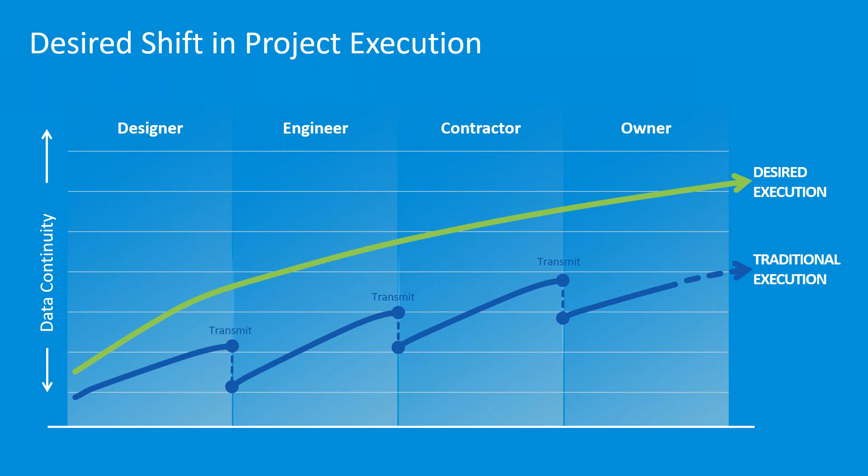So essentially, if you have in the end a very rich model where we've used asset tracking, where we've used all of the different aspects of BIM 360, then we get a very intelligent model that we can report on, that we can hook up to sensors, et cetera. So that's really the story of digital twin of 2 weeks ago. But as I mentioned at that time, there is really a piece still missing, which is in pre-construction, which is sort of the constructability.

Can we build it? How does clashing work, et cetera, which is really the remit of BIM 360 Coordinate. But essentially, again, single source of truth, we do get our common data platform, which is BIM 360 Docs as the main driver and vehicle, if you will, for all the information. And then depending on the discipline that you're working in, there might be some added tools on top of that, such as BIM 360 Design, but also BIM 360 Coordinate and BIM 360 Build.

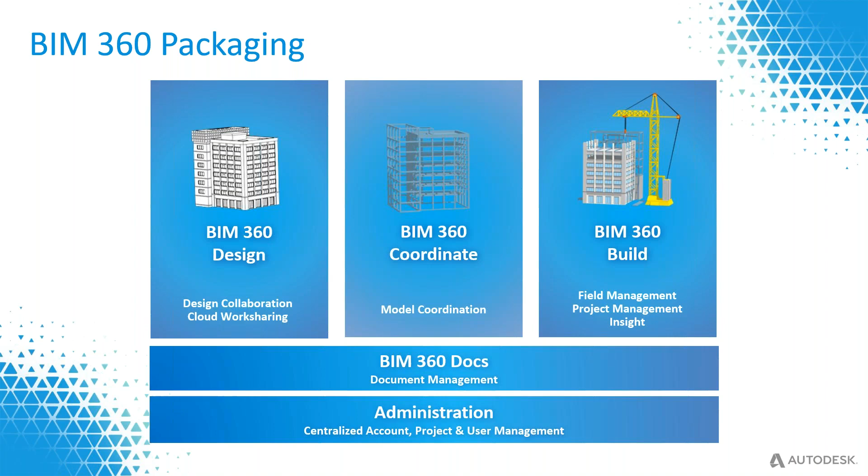So over time, before the holidays with the BIM 360 Design webinars, and then after the summer holidays with Digital Twin, where I did talk about BIM 360 Build as well, the only thing that sort of was missing was BIM 360 Coordinate. And there is quite a bit to talk about here, so that's why I kept it in a separate webinar. So that's what we're going to be looking at today.

So BIM 360 Coordinate, essentially, these are things that we see around the business. So in general challenges, it essentially is, again, around communication, right? We've already talked a lot of times about BIM 360. One of the key aspects I keep saying, and I keep repeating myself, is indeed that large model viewer, which allows us to view just about any file without the original authoring tools such as Revit or AutoCAD or Civil 3D or even Bentley MicroStation or whatever.

But still, when it comes to collaboration between different disciplines, yes, we've seen BIM 360 Design, yes, we've seen packages, but what about making sure that we don't have clashes, for instance? How do we make sure that we have communication between those different teams from that aspect? How about missing project information? Do we have all the relevant information inside of the same location? That's also very important.

And then one of the last aspects is that coordination is indeed considered to be a specialized activity, not just from the discipline itself, where we have to understand how to filter clashes, because if I just clash one model against another, I'm bound to find thousands of clashes. So you need to sort of filter out and understand what these clashes mean, but also because it is critical that we do coordination between different disciplines.

So what we're doing is with BIM 360 Coordinate, which again sits on top of BIM 360 Docs, such as BIM 360 Design is doing, such as BIM 360 Build is doing, it essentially means that we can, in the cloud, make sure that we have democratized coordination. It essentially means anyone can have a look at those clashes and understand what is going on. It also means, because we use the power of the cloud, that we can configure automatic clash detection. So essentially it means we upload something to BIM 360 Docs and it gets clashed automatically.

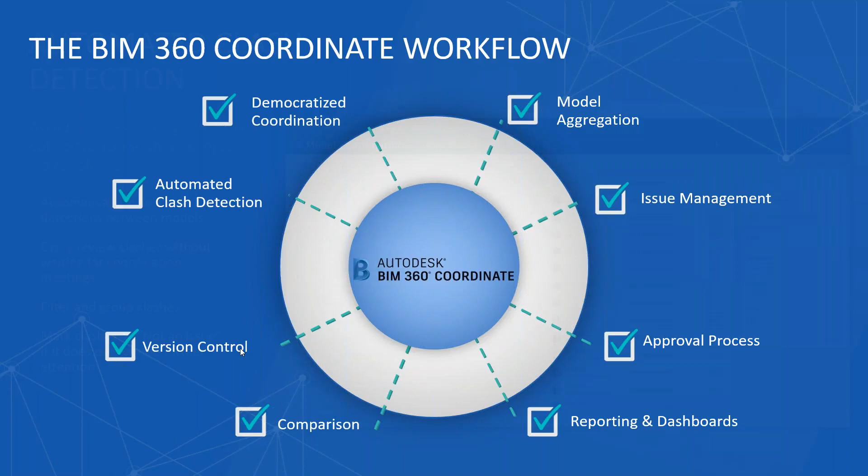Issue control and version control. So it means that we can have issues on clashes, and maybe in the next version we've solved that problem, so those issues can be closed. And so essentially that's sort of what we're looking at from a BIM 360 Coordinate point of view, right? So automated clash detection, and we'll go through the actual tool in a second.

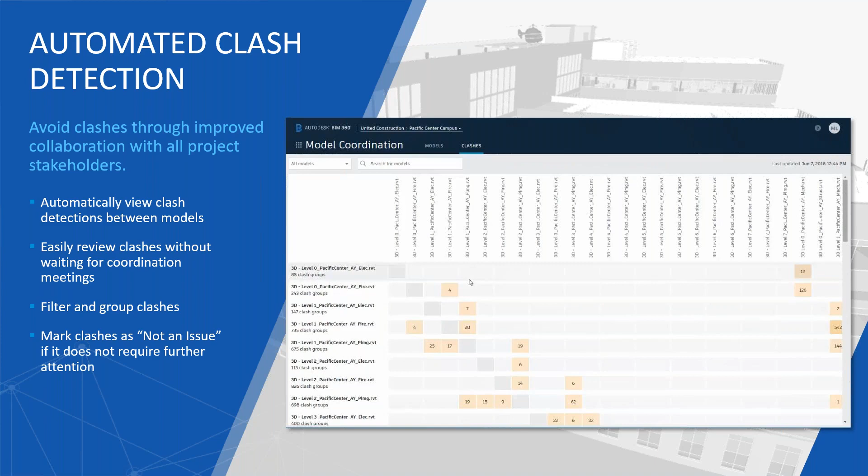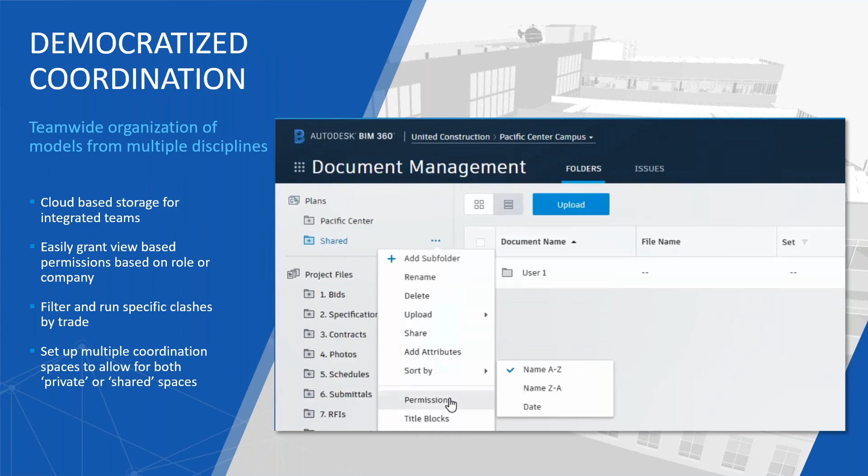It essentially means that we've got what we call a coordination space. We drop data into it and automatically we get the clashes. We get this nice matrix layout, which will help us understand how that clashing is working. So that's one aspect. We'll see all of this in action in a second. So automatic clash detection. As I mentioned, democratized coordination. It isn't anymore about having to understand how to upload. No, it is BIM 360 Docs at the basis.

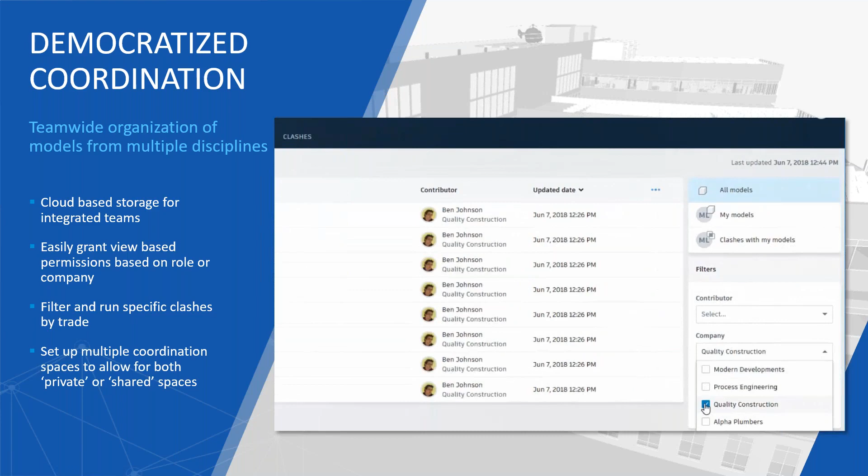I'll talk about a workflow which will leverage BIM 360 Design actually, and the packages there. But we can leverage that information right inside of BIM 360 Coordinate. So essentially it means we have a design, we save it to the cloud, and we automatically get our clashes out of it. We'll talk about that workflow in a second.

And then model aggregation. One of the things that we can also do is that, well, obviously, if we want to clash elements from, let's say, structural to HVAC and vice versa, or to electrical or whatever, it means that we have to be able to bring those models together.

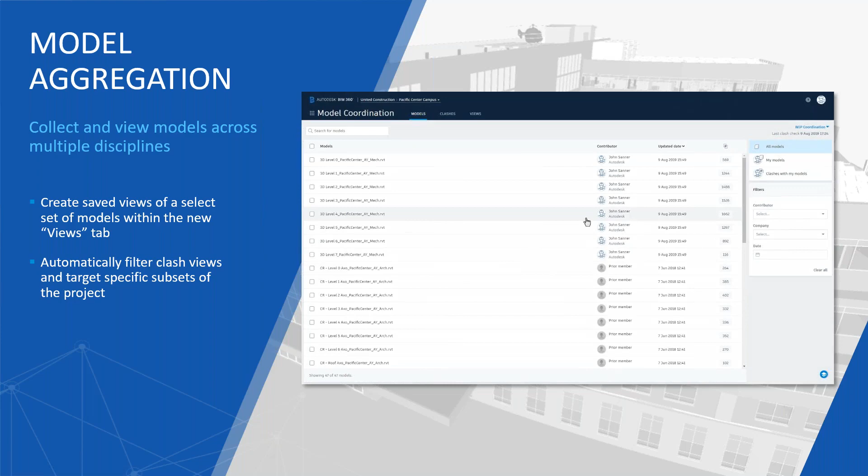So one of the aspects of BIM 360 Coordinate is also that we can view different models in context of one another.

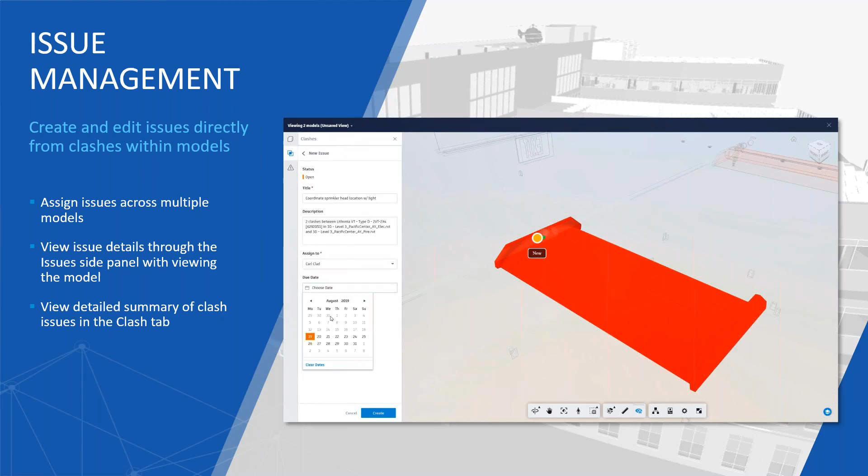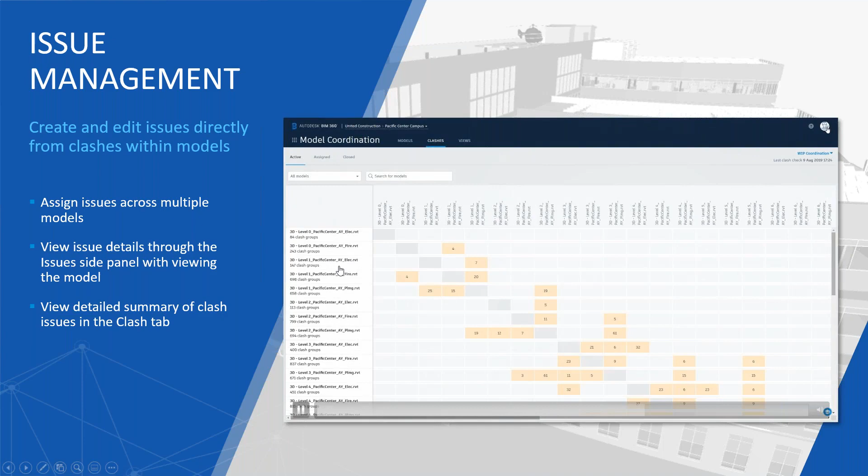Last thing is obviously when we find clashes, we need to be able to create issues on them, and that's what is happening here. Once we find a clash, we can say, let's create an issue. The most important thing here is that, as in BIM 360 Design where we can approve packages or send packages back, we can create issues on those. We can create issues in one file, we can create issues in BIM 360 Coordinate, and they all end up in the same place, which is BIM 360 Docs essentially. So we can start reporting on them and pulling out information from them, etc.

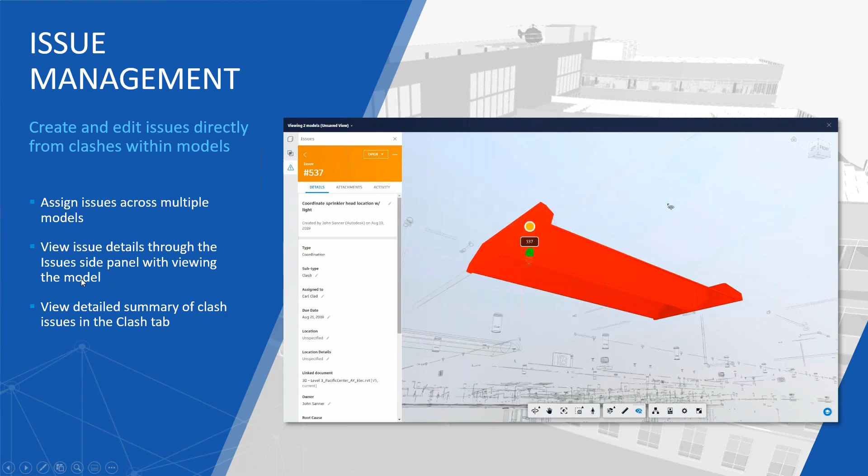So that's what I want to highlight from a PowerPoint point of view for BIM 360 Coordinate. Let's dive into the actual environment. I've got my BIM 360 Coordinate open here.

Actually, it is, of course, BIM 360 Document Management at the basis. And again, if you followed the other webinars, you'll notice I'm in the very same environment, the very same BIM 360 Docs project, which is BIM 360 FY21. So again, to reiterate the fact that this is a single source of truth - when we talk about BIM 360 Design, we talk about these folders here where we have our architectural project, our MEP project, etc.

Now, what we have here is what we call a coordination space in BIM 360 Coordinate. I've mentioned this in the previous webinars as well. We're looking at our single source of truth from a document management point of view here, but we can also filter our information based upon what we're looking for - for instance assets, which I spent time on last time, or cost management. So there are ways of filtering this information. Amongst other things, there is this model coordination aspect, which I'll dive into in a second.

Essentially, the only thing we need to do is tell BIM 360 where my coordination spaces are. In this case, I've created my aggregated folder here, and what you'll notice is it says master.rvt - one file is in my aggregation space.

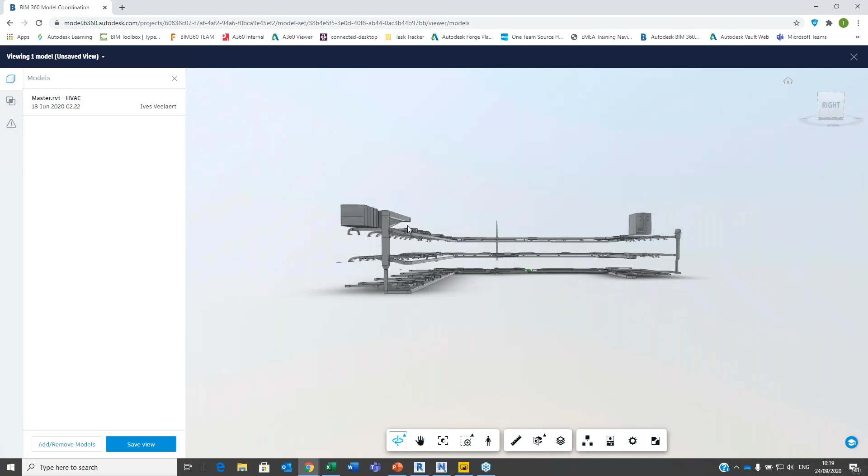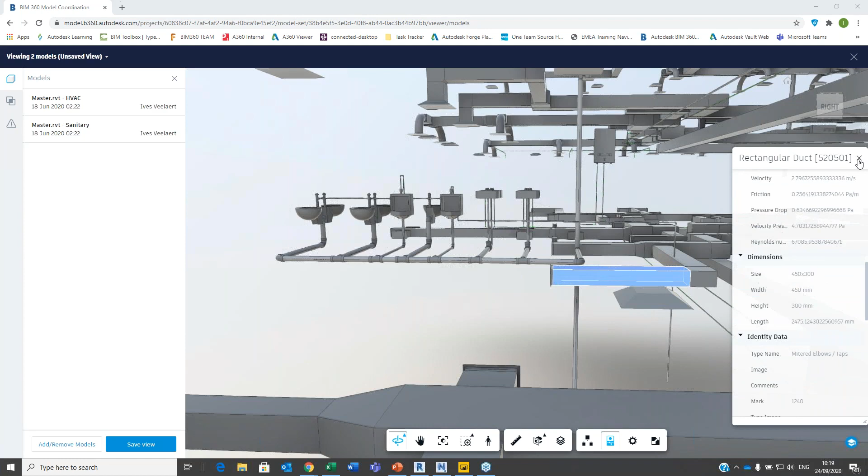Okay, nothing special. This is what I've just shown you in BIM 360 docs itself. This is indeed the HVAC system, right? So that's what we have in the building. The difference is that I can now say add remove models, and I can say, okay, I want to have sanitary as well. So you'll see that it's now loading 2 models, and there's my sanitary. And I've got all the richness of this viewer still there. If I want to understand what this is, I can go into the properties, and it's going to tell me this is a rectangular duct. It's got all the information from Revit inside, and that's what we see here.

Okay, so yeah, we've got HVAC, we've got sanitary. Let's continue to add some stuff. Maybe the electrical bits and pieces. Let's have a look at that. So we now have the lighting fixtures, we've got the electrical sockets, etc., and we can continue to move on.

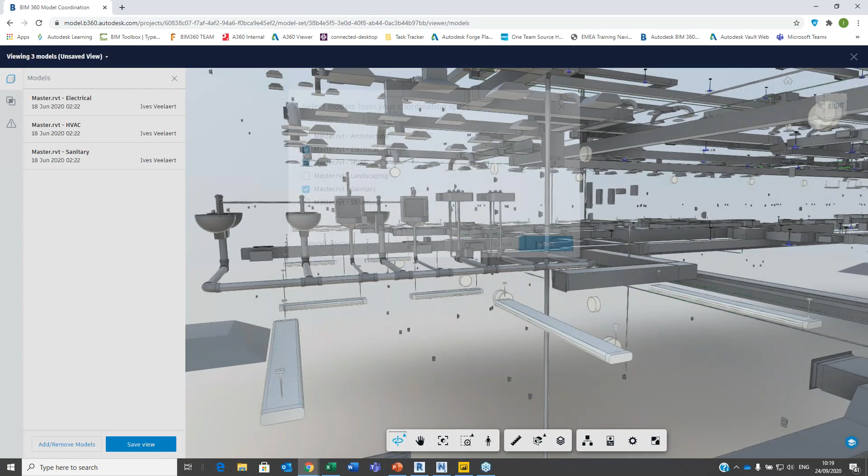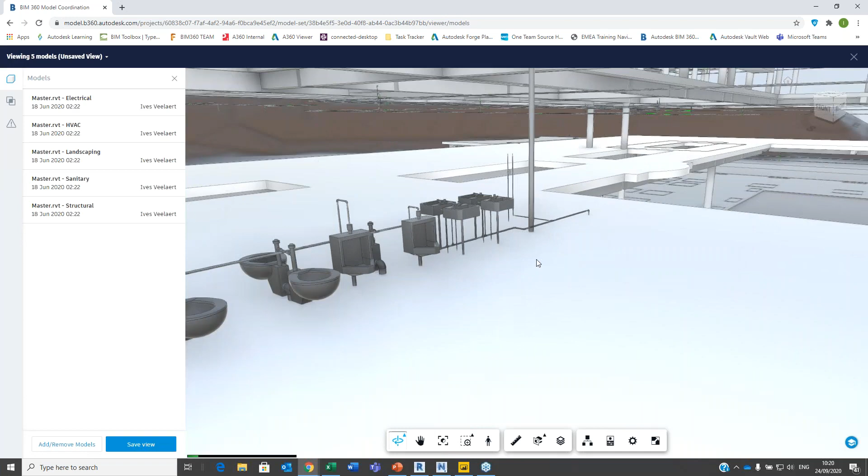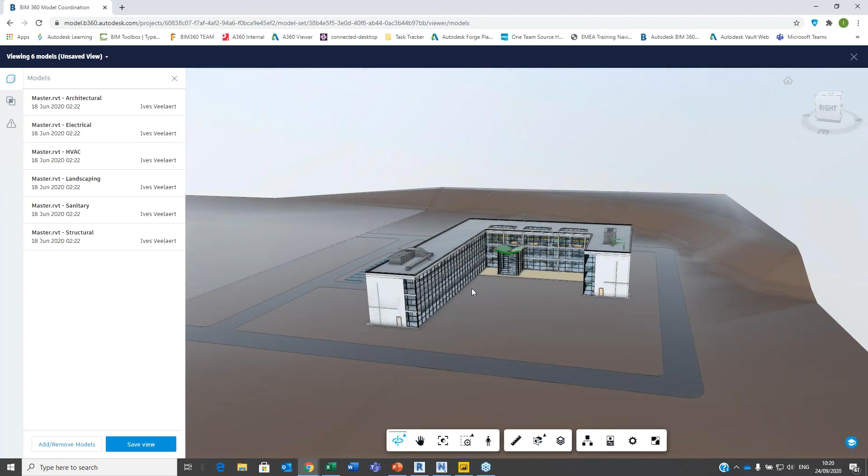Maybe I want to see the landscaping now. No, let's first do structural, select. There we go. So now we've got floors, actually floor slabs. And let's continue, I want to have the landscaping, select. Okay, so here's my terrain now. And finally, I'm going to add architectural. So those are just views. So these are just views, you know, this is one Revit file, different views, and we're looking at this in a combination. Okay, so that's the first aspect.

And what we can do now is, well, we've got all those different models, so we can clash them. And actually, this is happening automatically, right? So we can go in here and say, look, we've got our clashes. And what we're looking at is a matrix of each and every one of the views clashed against one another. So architectural versus architectural, well, that's not going to tell us much because that's going to be everything, right? So on the central axis, it's the view against itself. That's why we don't have anything in here.

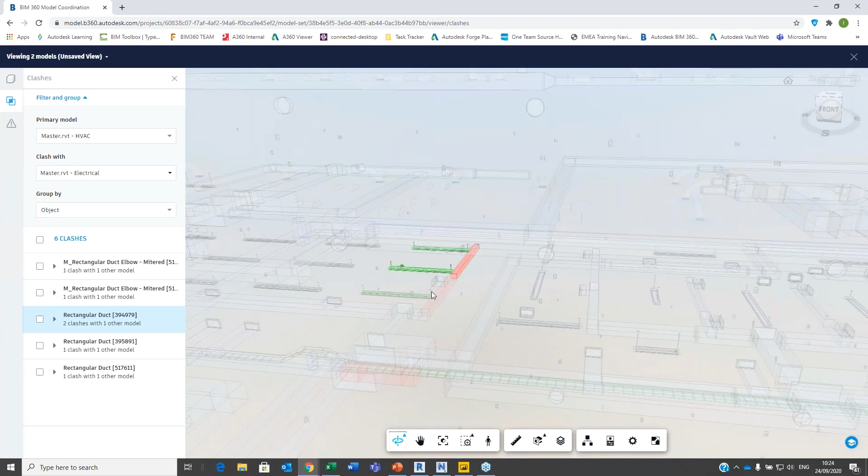Now, what you'll notice, and this has been added like this week, is that we've got our elements in context of one another, right? So HVAC versus electrical, and that's it.

Now maybe I want to see the rest of the model. So what I can do is go back into my models here, and I can say, you know what, I want all of—let's not take landscaping here, but let's focus on the rest. So I've just added everything.

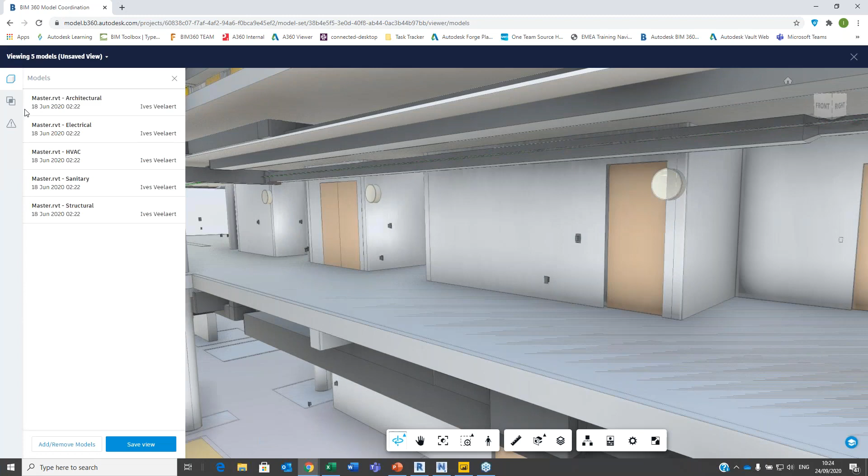If I go back to my clashes, I can now say, okay, HVAC, that's fine, and it's going to clash now with all 4 models. So it's now in the matrix, taking multiple columns together. We've got 1,118 clashes across everything.

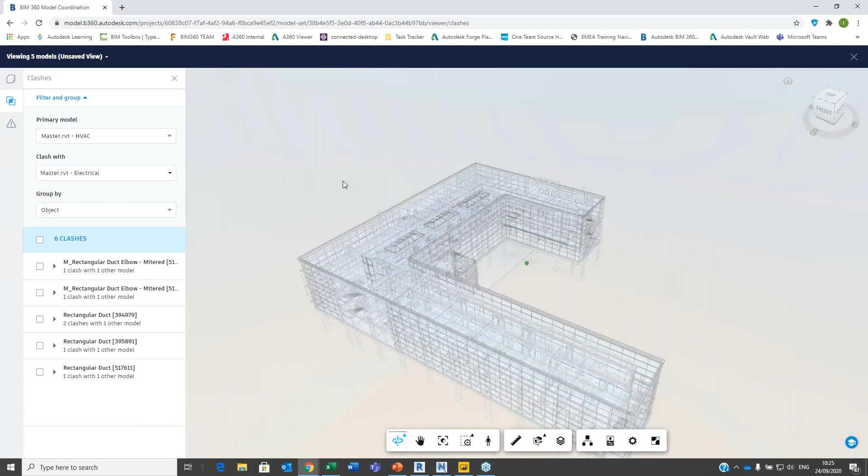Now, maybe what I want to do is still just focus on the electrical bits and pieces. So what we have now is, again, those 6 clashes, but now in context of the architectural model, etc.

And so from this point on, it's quite simple to say, I want to create an issue on this one. It's going to create a screenshot. We can assign it to someone, etc. You'll see that in a second.

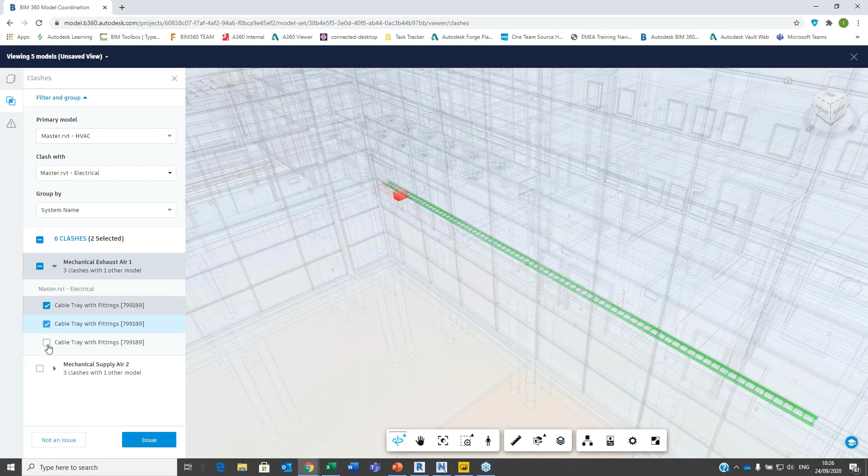Now, the other aspect is that we can also get our elements sorted by a certain group. So in this case, we're just looking at objects. We can also say, okay, in the case of HVAC, I want to understand this from a systems point of view. So the mechanical exhaust air has 3 problems with the cable tray, as you can see here. And again, we can create issues on that.

So, okay, I've got my views. I can look at the clashes. So let's go back to my clashes here for a second.

This is, as you can see, pretty flexible because I could say I want to search for models—maybe landscaping. What's the point of having landscaping clash with like a pipe that will run into the ground? So maybe I just want to get rid of landscaping. So what I can do is just remove this here.

And we now get a matrix of 5 by 5. Landscaping is out of the picture. So it's very flexible to actually go in and say, look, I want to understand clashes between certain views, certain models.

Okay, so back to basics. We've got our coordination space, we've set that up, it's a folder. We've dropped the file into it, and essentially we're looking at the results here. So there's still this piece missing in between.

So how do we get a file in here? We've already looked at BIM 360 Design in the past. So is there maybe a collaboration between BIM 360 Design and BIM 360 Coordinate? Well, let's go back to document management here. And again, I'm not going to spend too much time on BIM 360 Design here.

But essentially what we have is all of the different disciplines upload their model into their own work-in-progress environment. And at some point in time, they're going to create a package. And that's what we see in Shared, where we have the architectural model, the landscaping model, etc. So how does this relate, those folders, design and Shared, to something that is completely different, which is coordination?

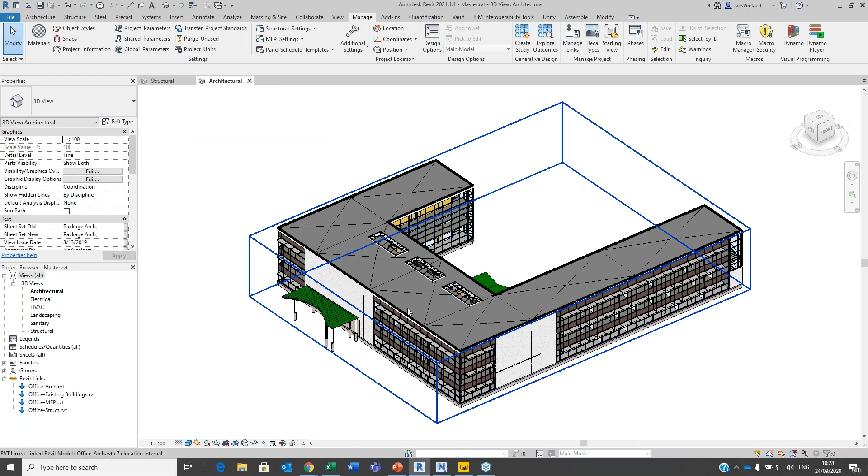Now, the question is, what did I upload here? So what you'll see is that I've got my different views. Those are the views that we do have inside of BIM 360 Coordinate. But what you'll also notice is I don't really have any elements in here. This actually is a link. Okay. So just to illustrate this, let's just quickly create a new view here, 3D view. There we go.

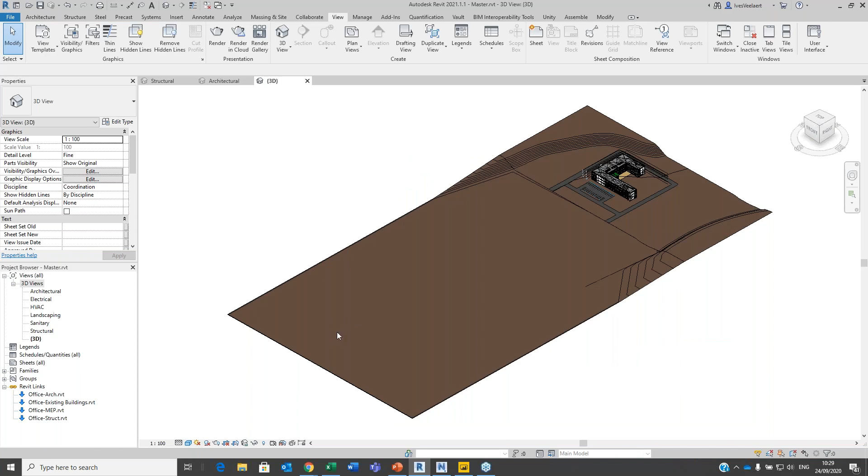So we've got everything here. Let's just fine tune this a little bit. Consistent colors. There we go. And I'll go in and we've got everything activated here. Let's just select all and activate everything. Right. So I've got all elements visible in this view. Right. So what happens if I now select everything here and we go and filter this?

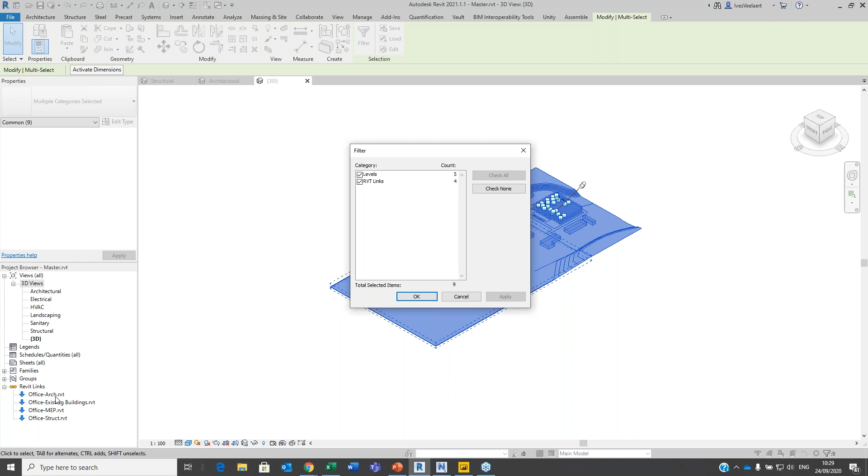Well, obviously in Revit, we also always have levels, but the only thing it shows here is links, Revit links, 4 Revit links, which corresponds to this. And guess what? Office architecture, existing buildings, MEP, structural is exactly what we see in here. And it tells me that office architecture is the one that I've linked from BIM 360, FY21, Project Files, Shared, architectural, shared landscaping. So essentially this file is an empty file. It just links in the information from this location, architectural, landscaping, MEP, structural.

So what does that mean? It essentially means that from BIM 360 Design, we get a new version, hit save to central, publish the file, create a package. That package goes into Shared. Those other disciplines, before they accept the package, they can actually just walk in here, look at master.rvt, understand the clashing, and see if it's all relevant to them. Okay, so that's what we have here.

Right. So the other aspect is that we can create issues, right? So we find a clash. So let's have a look at our issues here. And immediately what you'll see is that this one, master.rvt, it says here clash with cable tray. It sits in Document Management, and this is very important because it means that we can actually look at this file in BIM 360 Docs without a coordination module attached to it. It also means that we're going to be looking at this file from a BIM 360 Docs point of view, from a who's responsible for this point of view.

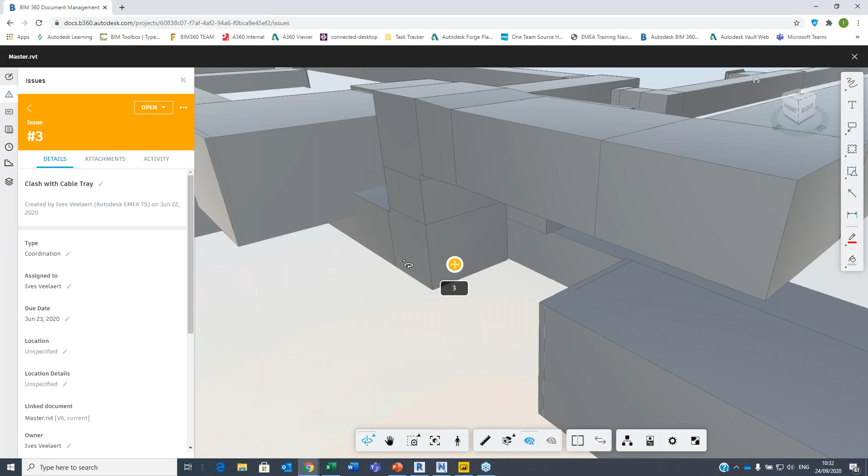And remember that in Coordinate, we had a view that we looked from and we clashed it against other disciplines. So essentially, the issue is being assigned to the view that we want to assign to a discipline. So what we have here is that we look at this from the HVAC point of view. This is the guy that needs to resolve it. Now, obviously, we don't really see the cable tray that's clashing because, again, this is basic BIM 360 Docs.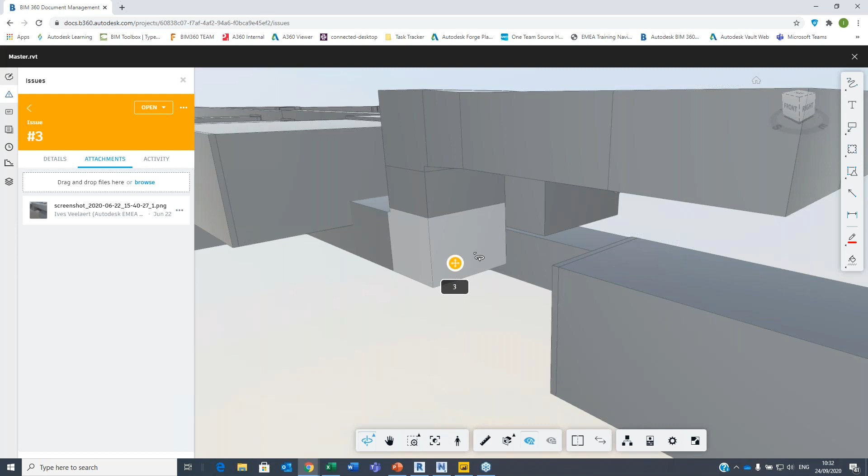We do have automatically an attachment here, and we could actually put some markups in there as well. But essentially, this is what we're looking at. So this is automatically attached to my issue. Okay, and so we can look at this, we can open the Revit file, we can pretty much try and solve this problem. Now, I did mention that we also have this collaboration with Navisworks, so let's answer a couple of questions that I tend to get here.

One is, how do you get to those views, you know, in model coordination? What if I want to split out by level is one of the questions that I tend to get. So I'm not interested in just this architectural file. I'm not interested in just this electrical file. What I want to have is certain aspects of the architectural model and maybe split out by level. This is something that goes back to, for instance, Navisworks, or maybe the equivalent in BIM 360 Glue in the past. Essentially, I want to slice and dice those models. Well, you can still do that.

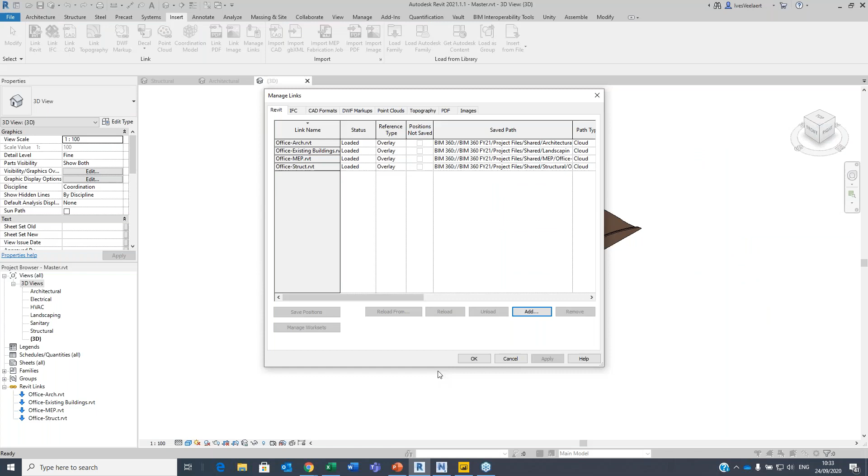What you can do is go into Revit, because these are just filters on my views, right? So if I want to have just the one level, I can do so. I can create multiple views and I can publish them into this environment. And if I then want to see, let's say, architectural, see, this is filtering out. So if I was to say I've got multiple levels and I just type in level 1 here, I would get all the disciplines, electrical, architectural, MEP, etc., of level 1.

So that's how we can class this. And again, we could also filter here where we say, okay, level 1. Of course, I don't have that in the title or anything, so we won't see anything. But that's where this matrix would get filtered out. So that's one aspect. Basically, it's down to Revit to make sure that we have these set up. And this could be in a template, right?

So no problem there. The other aspect is that with BIM 360 Coordinate, people tend to ask me, what sort of clashes do you do there? Well, BIM 360 Coordinate is, quite frankly, hard clashes. So it's zero tolerance. It's really a face into a face of different elements. So essentially what we have here is the very same workflow that we had in the past with BIM 360 Glue and Navisworks, where Glue is your preliminary check, which you can do on a daily basis. And it doesn't mean that you need to get rid of Navisworks. Navisworks is still your high-end clash detection tool. And the beauty is that these days, those two can be combined as well.

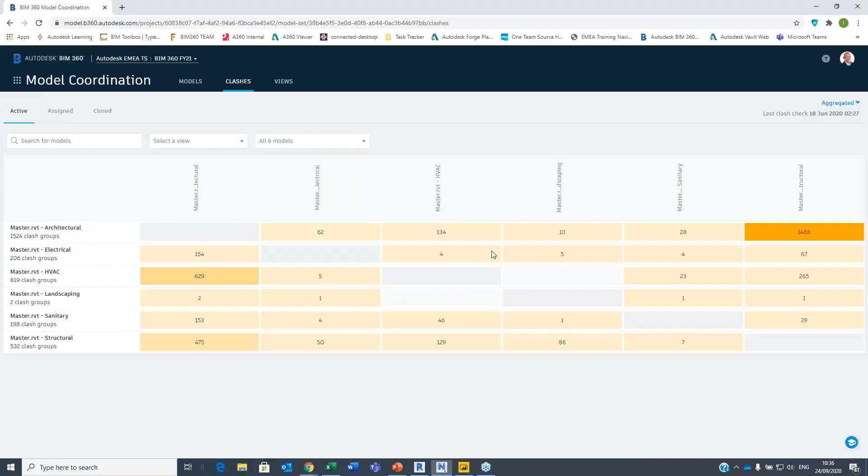And those views will pop up in my selection tree, and I can, again, slice and dice this any way I see fit inside of Navisworks. So it's loading all those different aspects. And again, we're looking now at those very same elements that came from the shared environment from BIM 360 Design, if you will. So let's first make this a little bit nicer, and let's do some horizon here. Let's start walking for a second and maybe zoom in a little bit. There we go. Okay, so we've got everything here, right?

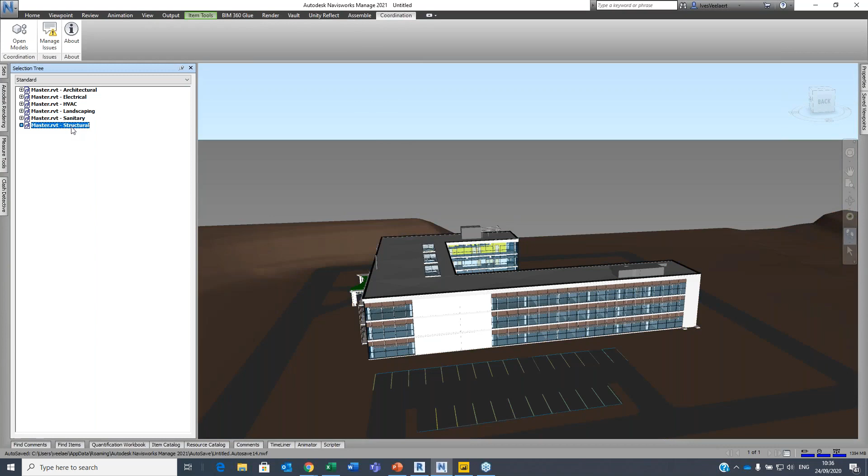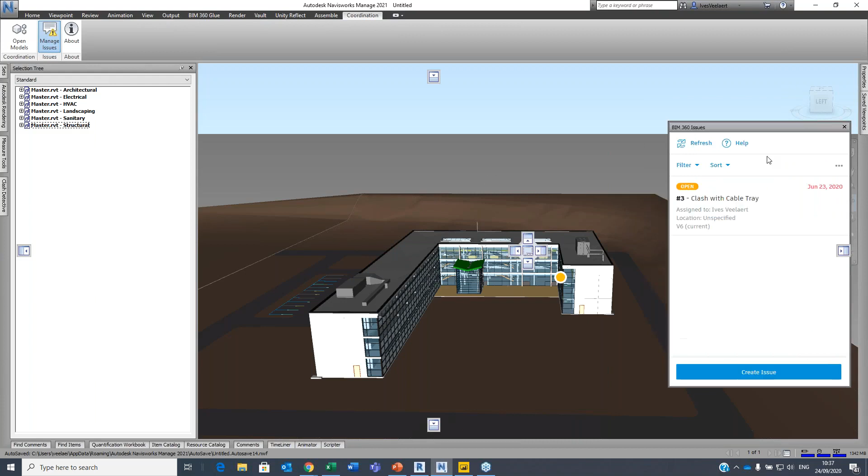So if I want to see my selection tree, let's just activate that for a second. We've got all of our different models here, which are basically views which came from the shared environment from BIM 360 Design, as I mentioned. And so what we can do now is take it to the next level. We've got all these views. Remember that I had this issue, which was the clash between HVAC and that electrical cable tray. So I can go in here and say, manage those issues. And you'll see that it says there's a clash with a cable tray, which again, I can view here.

So this is exactly the same thing as what we have inside of BIM 360. It has the same status. I could actually close it here or answer it or whatever. The attachment with the view is still there. Everything is there. Now we're looking at all of these different models. So we have that functionality of Navisworks just at our hands, right?

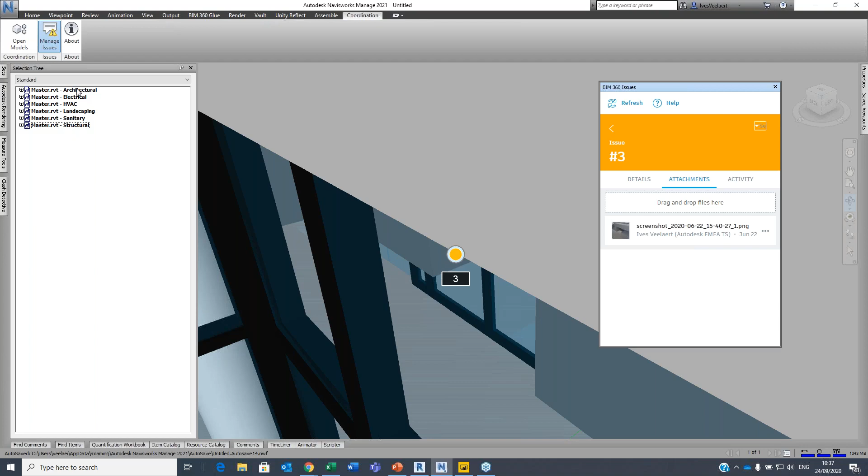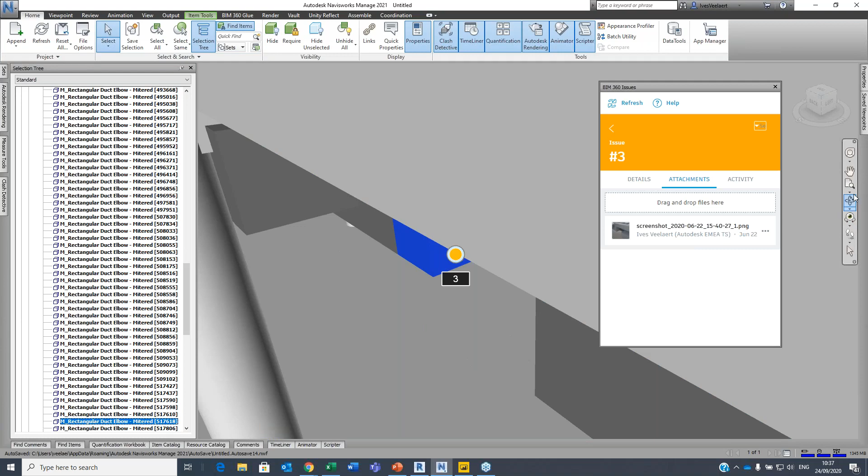So architectural, we want to get rid of it. Landscaping, let's get rid of it. Sanitary, let's get rid of it. Electrical, HVAC, that was important for this clash, of course. And you know what? I want to keep structural in as well. So what I can do now is basically hide those elements. There we go. And now I can have a proper look at this clash, which will show me the HVAC system and the electrical system as well.

Okay, so we've got all of this here. So let's take it again to the next level and let's rerun those clashes, but now from a Navisworks point of view. So what we're gonna do is let's just zoom out a little bit. This is fine. And what I'm gonna do is I'm gonna open up my clash detective. I'm gonna set up a test here. Let's just keep it as it is.

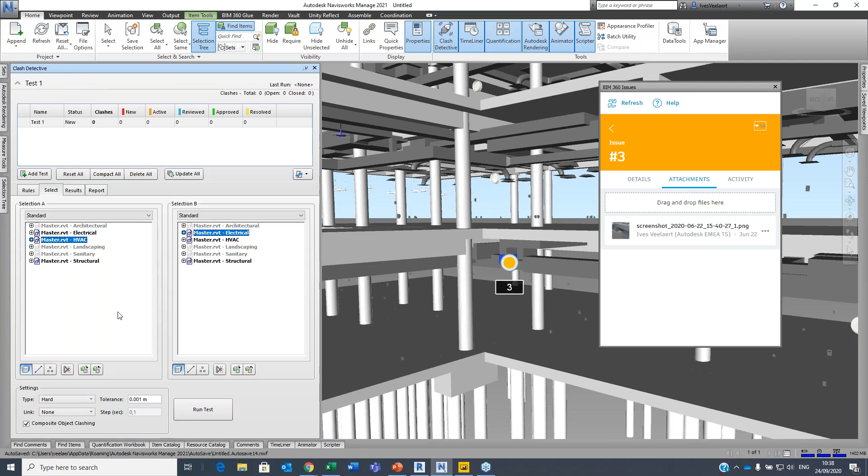And I'm gonna clash, let's say HVAC against electrical. That's fine. It's still a hard clash, but in this case, we could therefore fine tune it. Let's say HVAC electrical. Yes, that's fine. Run the test. And what you'll see is that we have 6 clashes, which corresponds again to what we have inside of BIM 360 Coordinate.

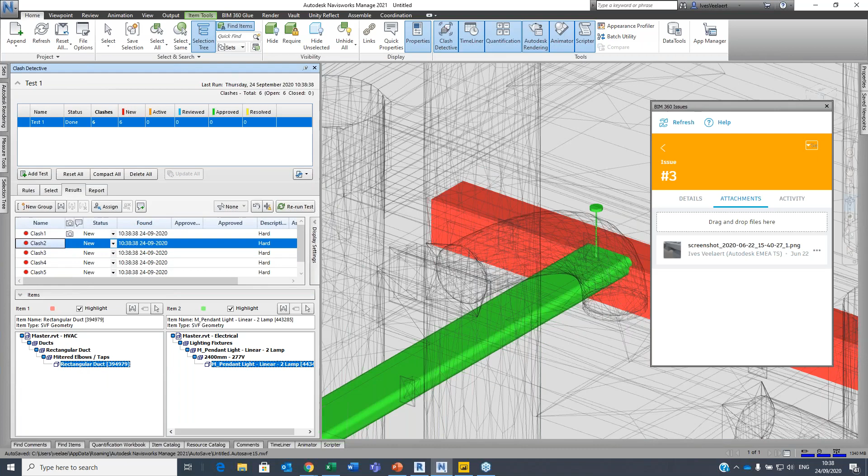All right. So we've got clash number 1, clash number 2. And interestingly enough, my duct here is the one that's causing the problem with the 2 pendant lights here, which corresponds exactly to what we've seen inside of BIM 360 Coordinate, right? So if I look at my 2 clashes here, that's exactly the same problem, and it has grouped them by the rectangular duct. So again, that advanced functionality that we have inside of Navisworks is still there.

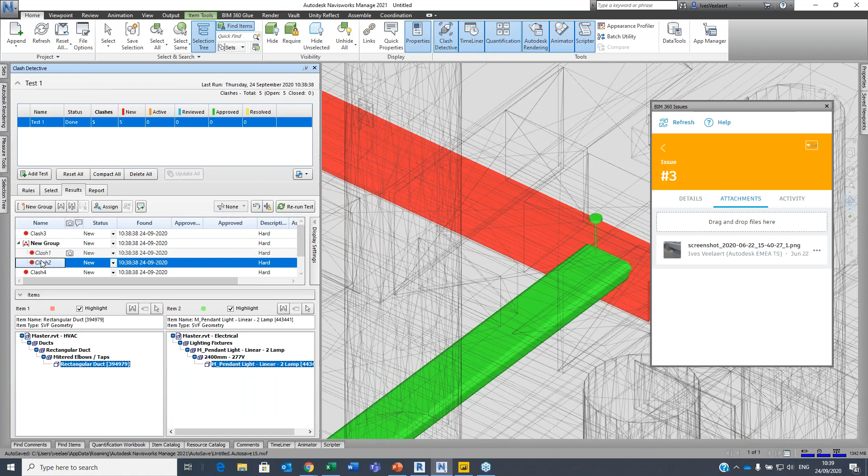So if I say rectangular duct, group clashes involving this item, you'll see that it now says this is a new group with 2 clashes, which is this one and that one. And again, if we now want to take it to the next level and say clash number 4, this is really a problem, I could just go in here and say, you know what, I want to create an issue here, assign it to this point. It will pop up in BIM 360. We can look at the issue list, etc. So a full-blown round-trip workflow between BIM 360 Coordinate and Navisworks. Okay.

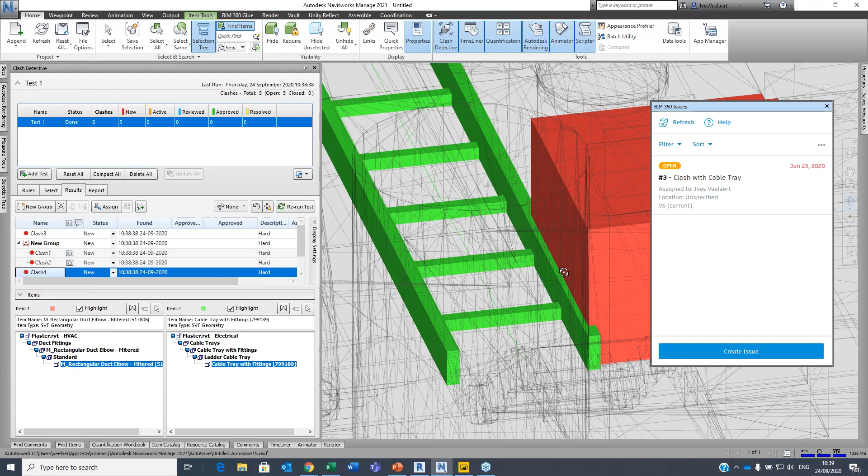Right, last thing. So how does this then relate as a Navisworks file to BIM 360? Well, remember that we still have Desktop Connector. So if I go into my Windows Explorer, what you'll see is that we have BIM 360 here, and we've got EMEA Technical Sales, BIM 360 FY21, project files. So I could actually go in here through Navisworks and say, okay, I want to save this as an NWF file, or I want to publish this as an NWD file and push this into BIM 360.

So anyone around the globe that has access to that folder inside of BIM 360 Docs essentially has access to that same view, those same results. They can go into the issues, they can look at BIM 360 Coordinate if they have access to BIM 360 Coordinate. Otherwise, they'll look at it from a BIM 360 Docs point of view. And so again, very flexible to tie all of this together.

I showed very specifically a Revit workflow. I haven't looked at the questions just yet, but I'm imagining there might be a question around IFC. So yes, we can do the very same workflow with IFC files as well. Right, so that sort of concludes that first step, which is BIM 360 Coordinate and BIM 360, and Navisworks. So let's go back to my PowerPoint here for a second.

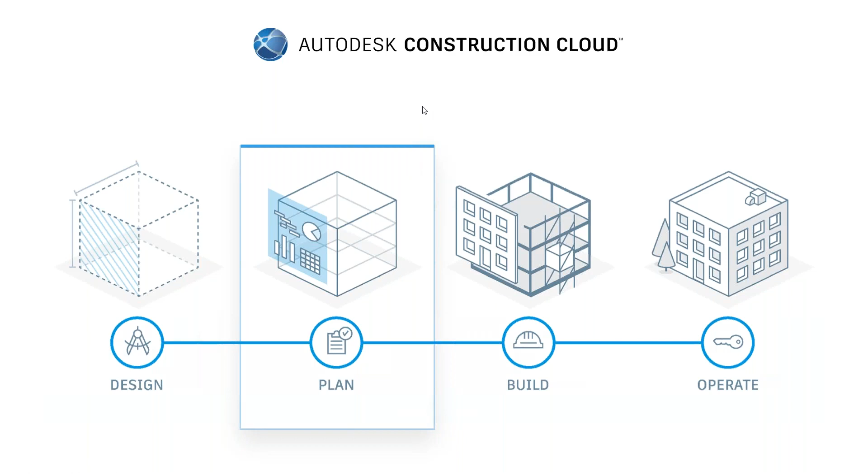And I do want to very briefly talk about Assemble here, because I do get a lot of questions. What's the difference between Navisworks and Assemble? What can you do with Assemble? Why is Assemble there, etc.? So Assemble is very much a tool that sits within the planning stage, just as BIM 360 Coordinate and Navisworks are sitting there. And Assemble basically does a couple of things that it's quite unique at.

It can validate information. So let's say that we move forward in design and we are adhering to LOD, level of detail or level of development. And at some point in time, fire rating needs to be added to a building, for instance. And we receive a file from the architect and we want to validate whether all doors have fire rating attached to them. So that's one of the aspects that we can very easily do inside of Assemble, verifying a model and if need be, sending it back actually.

Another aspect of Assemble is that it can do a pretty far-fetched quantification and indeed cost if we choose to do so. So essentially it means that we've got our design models, and through model conditioning, basically reporting on parameters on the Revit families, on the IFC models, on whatever can be uploaded in Assemble, and I'll get to that in a second, we can sort of put legends on it and say, okay, what sort of categories do we have?

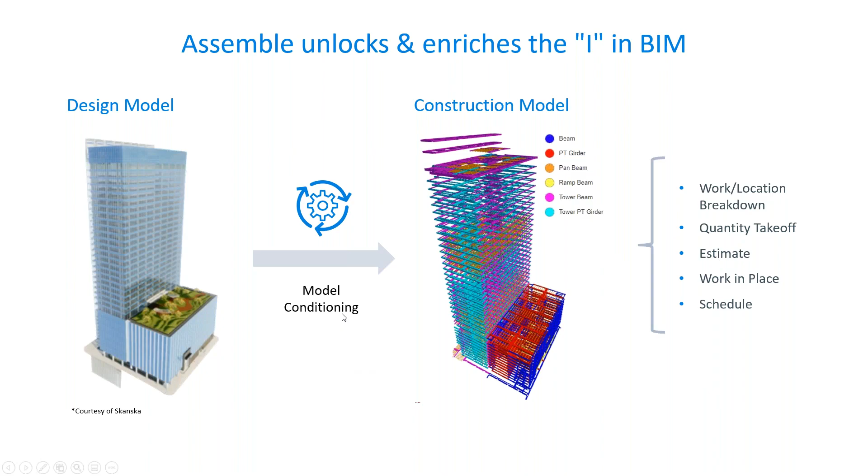We want to filter this by level maybe, etc. And essentially it means that we can enrich our BIM model with specific Assemble encoding, if you will, such as work location breakdown, quantity takeoff, estimation, etc. So that's what we have here. So again, let's have a look at how this is working.

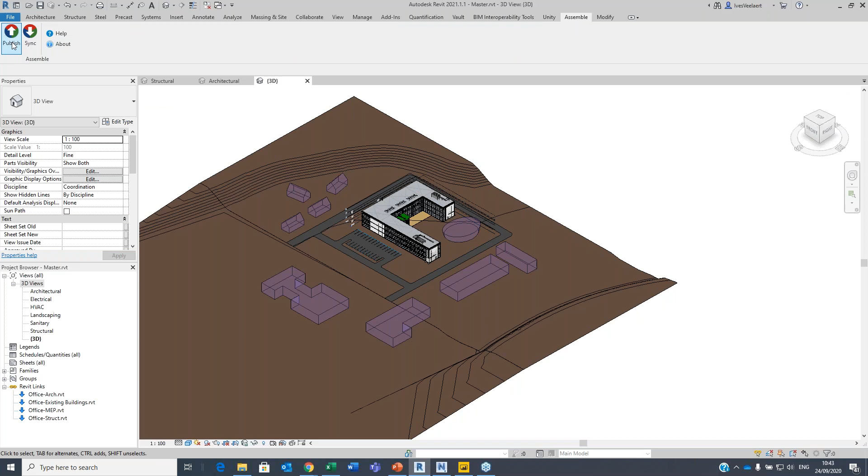So I've got my Assemble open here, and I've got a very specific project, which is this one, IVT. And what you'll see is that, again, we've uploaded those 4 very same models into Assemble here. So how do we do that? Very simple. From Revit, for instance, or from Navisworks, we've got this Assemble tab. We just go publish. We point to the right project that we want to have this information in, and it's going to publish those files.

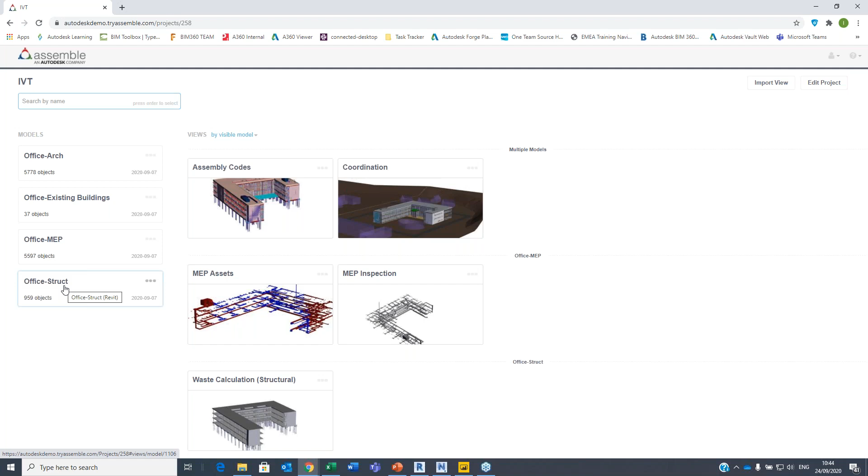So as I mentioned, this works for Revit, this works for AutoCAD, this works for Navisworks. So any file that you can get into Navisworks, we can also push into Assemble. Okay, so IFC files, etc. And the first thing is, again, same thing. So there is a bit of overlap with Navisworks. It just depends on what you want to use it for. So I could go in here and say, okay, I want to view this structural file. And this is going to represent that structural file in a little bit of a different way compared to how we see it in Navisworks.

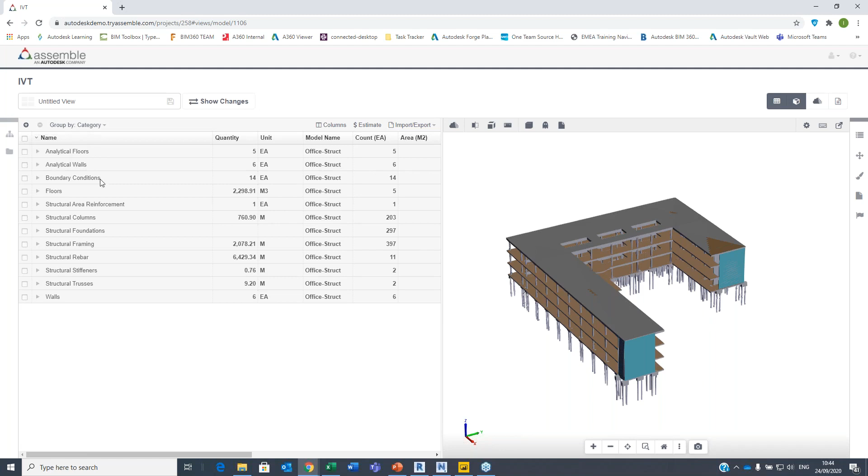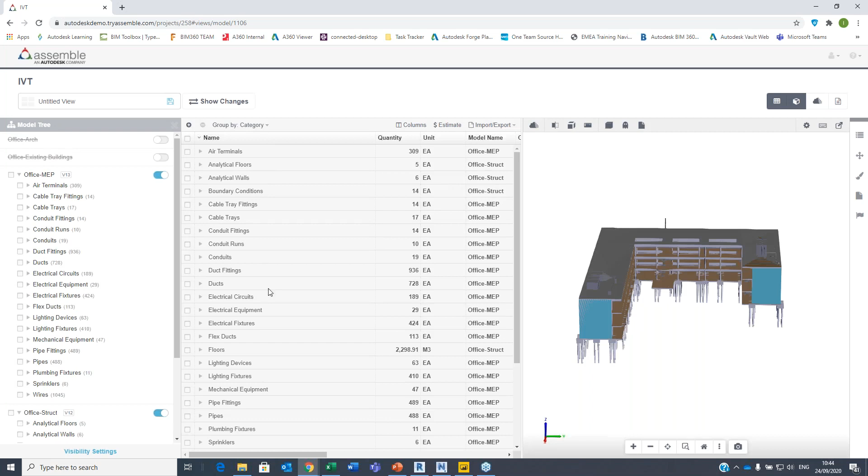In this case, we have our inventory and we've got our model next to it. So our inventory is just a listing of all the objects, all the elements based upon a certain parameter or a combination of parameters. So in this case, it's just showing me all the different categories, so you'll see that there's about 15 categories. What I can do is I can go into the model tree here and say, you know what? I don't want to have just a structural file. Let's also have a look at the MEP file. So again, this is now going to load those elements inside of my viewer, and it's going to enrich the inventory here.

Okay, so we now have Office MEP, Office Structural. Let's put in the existing buildings again. So that's the surroundings. There we go. And last but not least, the architectural model to get the hull of the whole thing. All right. There we go. So pretty much the same thing as we have in Navisworks, right? We now have all those different elements here. So what we can do now is say, you know what? I want to have maybe other parameters here. So automatically, it's telling me that I have 309 air terminals. I've got some analytical floors, etc. Those floors here, for instance, it's going to tell me that we have a certain area, certain volume, certain parameter.

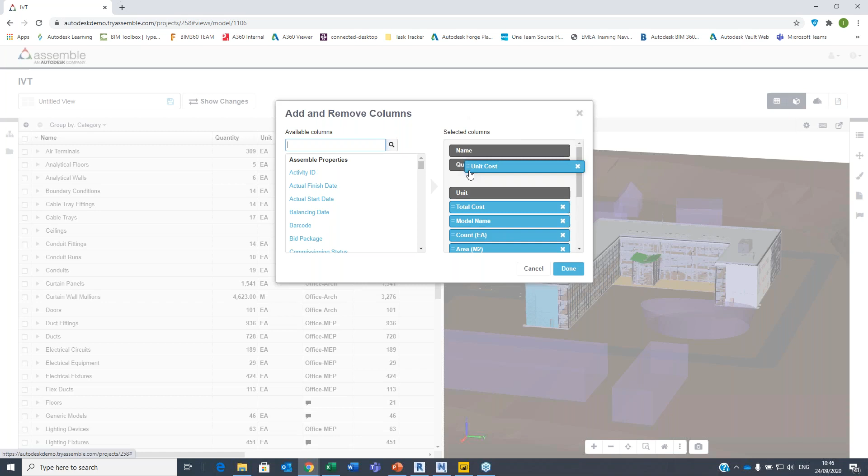And what I can do now is I can actually say, okay, in this view, maybe I want to add columns. So I'm just going to hit this add columns. And one of the parameters inside of Assemble is the unit cost and the total cost. So what you see to the right here are the different columns: name, quantity, unit. So I've just added total cost. There we go. Oh, I thought I had unit cost as well. I didn't, so I'm just going to put that in as well. Unit cost. Done. And what you'll see now is that it's going to get me the unit cost and total cost of everything. So essentially, what we're looking at here is a cost calculation aspect of Assemble.

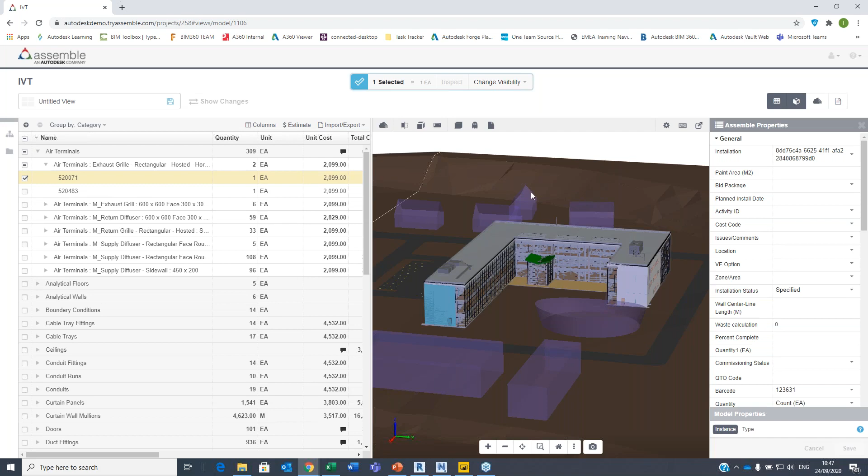Now, the question is again, how did I get cost in here? And it depends a little bit. So if I look at an air terminal, for instance, I can just go in here and say change visibility, hide others, and just focus on this air terminal. There we go. If I now take this one and zoom into it, that's my air terminal. I have ghost mode, so I can activate the rest, so I see where this thing is in context of the whole environment, right?

Anyway, what you'll see is, as I mentioned, we've got the parameters of Revit. So I've got my instance parameters, type parameters, but I also have Assemble parameters. So this is something that I can configure. This is in the project settings, and you'll see that it says, for instance, barcode.

So we can actually do asset checking with this one. And there's my unit cost and total cost, okay? And the way we count it, quantity, in this case, it's each, but maybe we have height, volume, width, etc., etc. So we can specify that. So very easy to set up, actually.

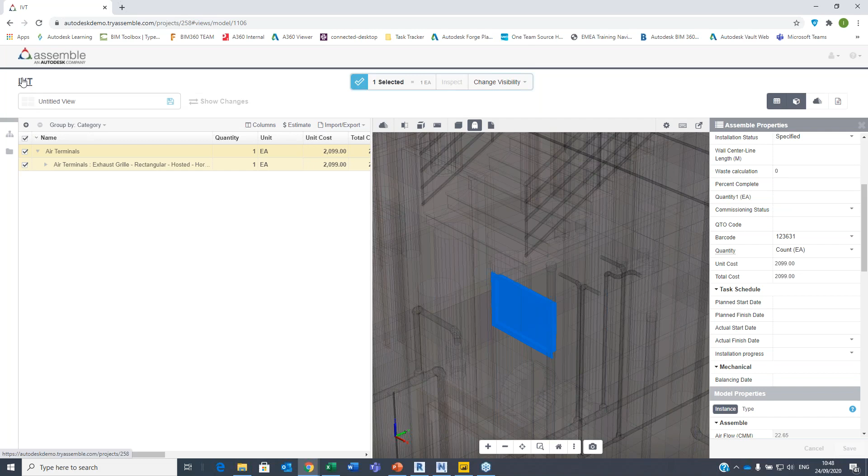Now, you might be wondering, wow, if I have to do that for all of my elements and specify the cost, etc., etc. So that's where the beauty of Assemble comes in, because if I go back to my project here and I go into my project settings, then you'll notice that it says here, Assemble property. So this is where we define our unit cost and what have you. So all of those different properties are in here, but also I have a data tree.

And this is, for those of you who use it in Revit, this is exactly the uniformat file format. It doesn't necessarily have to be the uniformat file format. We can just define this as we see fit. The beauty is we can set this up through an import export. This is just a text file, so we can export this, and guess what? It says here, export for Autodesk Revit, or export assembly codes and unit cost to Microsoft Excel.

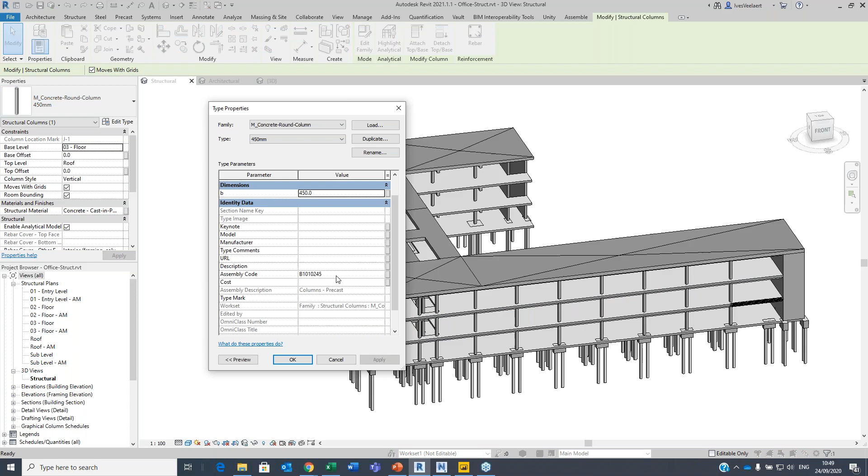So let's go back inside of my model here, and I'm gonna focus on the structural elements here. So if I select this element and I go in edit type, then you'll see that from those Revit families, I've already attached an assembly code to the type, which essentially corresponds to additional settings, assembly code, view this listing. So guess what? A substructure, A10 foundations, A1010, etc., etc. It is indeed very much the same file as what we see here, with one difference.

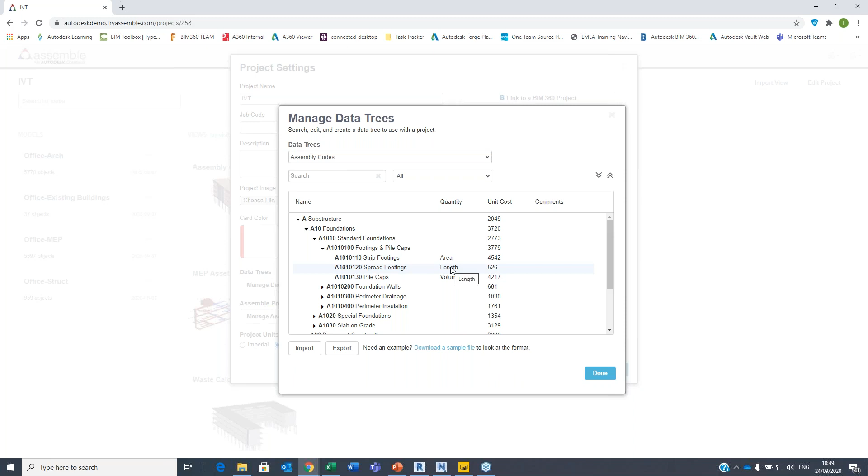In Assemble, I attach unit cost, and I do tell the system how to count for this. So strip footing, I want to have the area. Spread footings, I want to have the length. So this is very powerful, because if we apply a system to Revit, we use the same codes in Assemble, we immediately have the cost, okay? And there's a lot more powerful stuff that we can do to this.

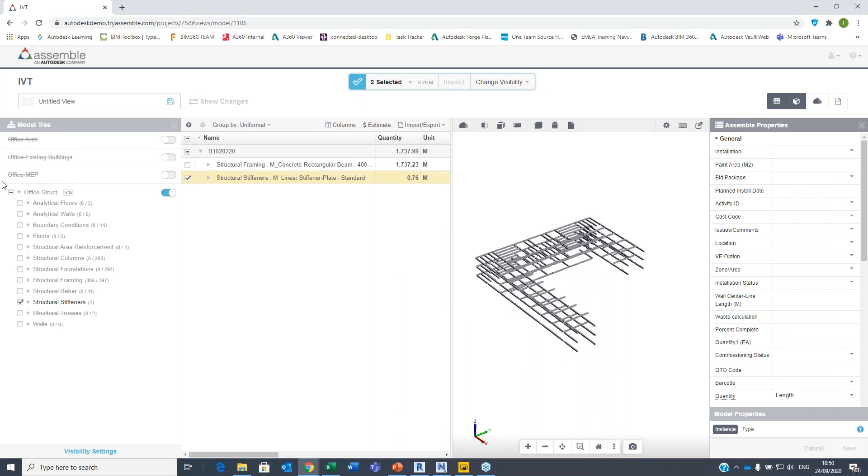So let's go back to our Office structural file. And what we can do here is, for instance, I want to view this not by category, I want to view this by that uniformat code. So let's just slice and dice this model according to uniformat code. So change visibility, hide. So I've just hidden one of those elements. Maybe now I want to hide the others. So what we're looking at here is this uniformat code, structural framing, structural stiffeners, for instance. All right. So let's just activate everything again unhide. There we go. Let's close this for a second.

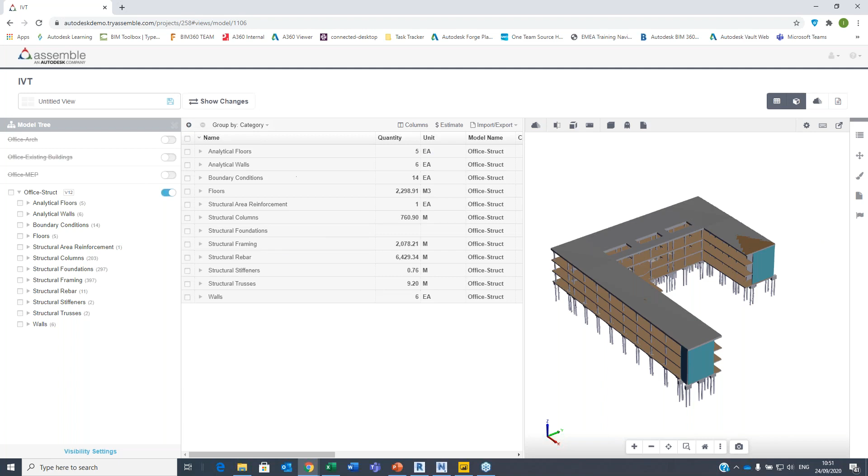So I'm back into my overview. And we can actually create these groupings. We can filter any which way we see fit for any file we can get in here. IFC, Navisworks, Revit, etc., etc. So let's go back to category here for a second. The other aspect is that if I look at this, and we've got all of our elements, right?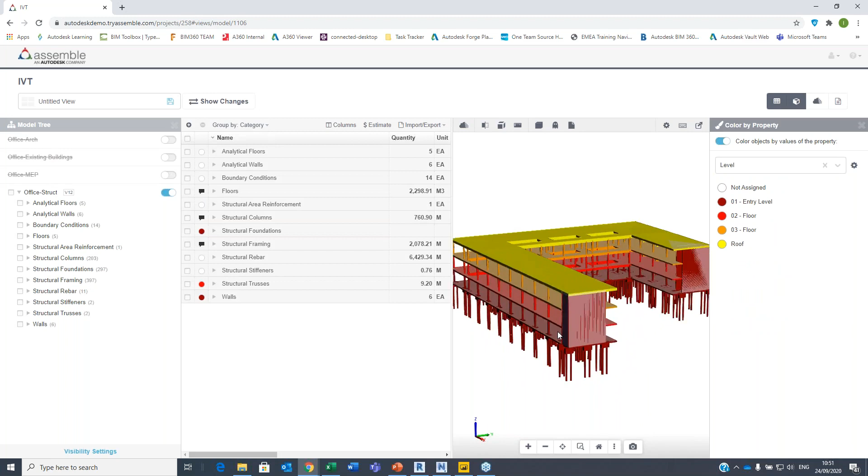I can now say, okay, maybe I want to color this by a certain property. So let's say we're looking at this from a category point of view. Maybe I want to look at this from a level point of view. So let's just take our level here, and it's now going to tell me that there are some elements here on entry level, floor 2, floor 3. And there's also a couple of elements not assigned. That's quite interesting because maybe, and that's validation, right? Maybe I do want to have them assigned to a certain level. And maybe this is something that's just quite simply wrong.

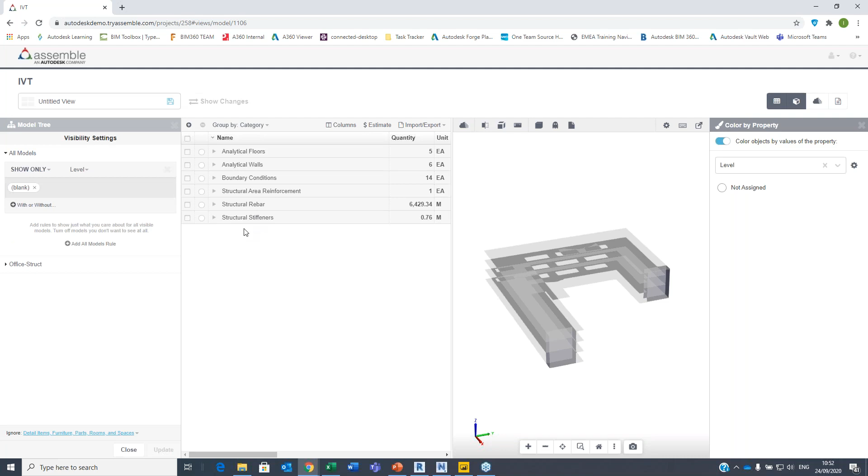So what I can do is I can go in here and I can apply rules to my elements. I can say, you know what, give me again the level, show only the level with a blank, which is not assigned, right? So update. Let's see in our inventory what we have. It tells me analytical floors, walls, conditions, reinforcement. So this kind of makes sense. This is something that we don't need actually.

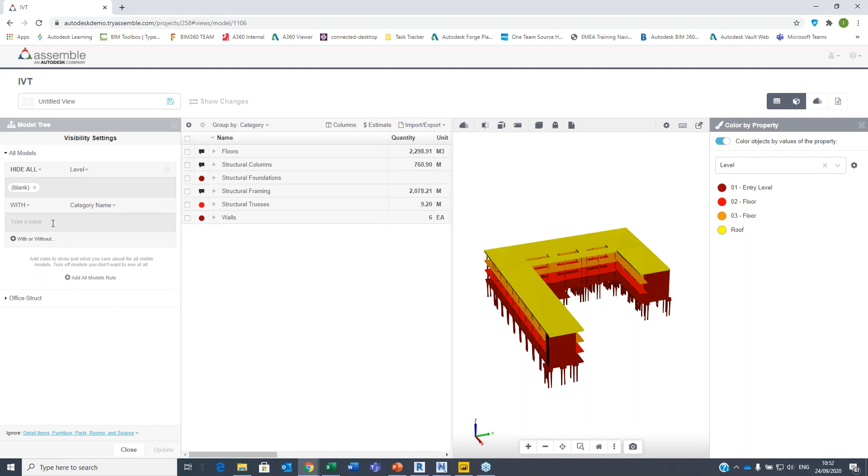Okay, so what I can do now is just reverse this, and I can say hide all of those blanks, update, and it's going to bring me back the structural model, but this time without the blanks. So that's what we see here. And we can continue to slice and dice this, you know. So I can say, you know what, I want with another property, which is maybe the category name. I just want to see floors, you know. There we go, update.

Hide all. That's of course wrong because what I want to do is add a model rule to show only the floors. That's going to be better. There we go, update. So we now have only those floors.

And again, if I want to split it and show only the entry level and floor number 2, that's fine as well. The other cool thing is that if we look at the website of Assemble, you'll see that we have those add-ins.

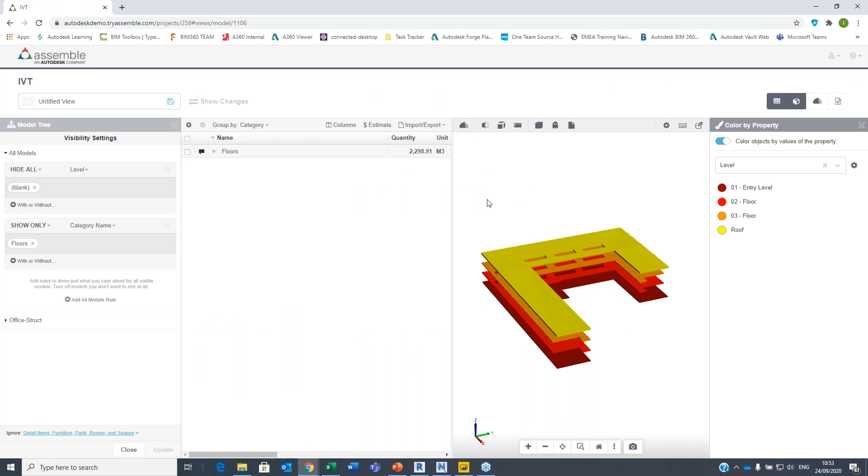We also have this Excel add-in, and we also have a Power BI add-in. So what we can do here is say for this element, all of the elements here have what we call a waste calculation, which is empty. The cool thing is we can use an integration with Excel, which you see here. I've configured my Excel connection to point to Assemble, to my project, and to a certain view, which says waste calculation.

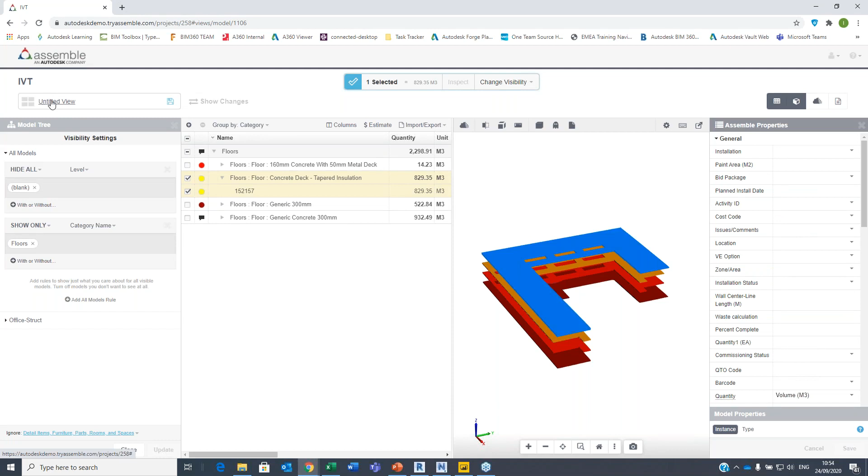I can actually show that inside of my view here. So if I go back, leave without saving, here's my waste calculation. Essentially, this is what I'm going to calculate my waste on. So I've specified what I want to pull from Assemble, and the only thing I need to do now is run this report.

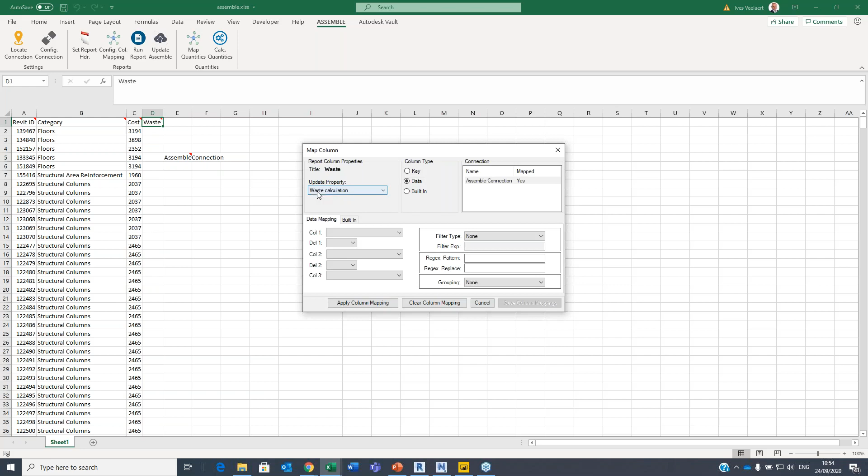The interesting bit is that it's going to tell me the different Revit IDs, the categories, the cost that I pulled from Revit itself, for instance through the Uniformat code. The one thing I want to specify is that this waste is quite specific, because it says this is an update property, waste calculation. So what I can now do is say this equals 0.1 times that one.

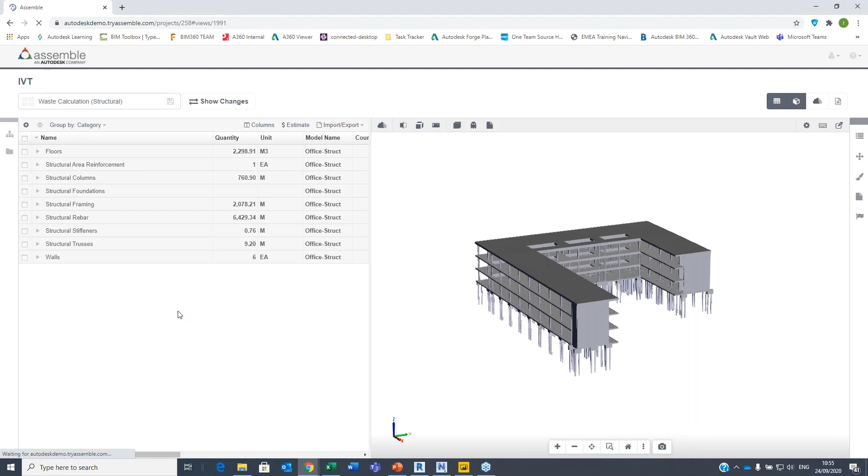There we go. And I can now say I want to paste this. There we go, and I want to update Assemble. Continue. So if I go into Assemble now, just refresh one time, and I look at this property, waste calculation, now says 235.2.

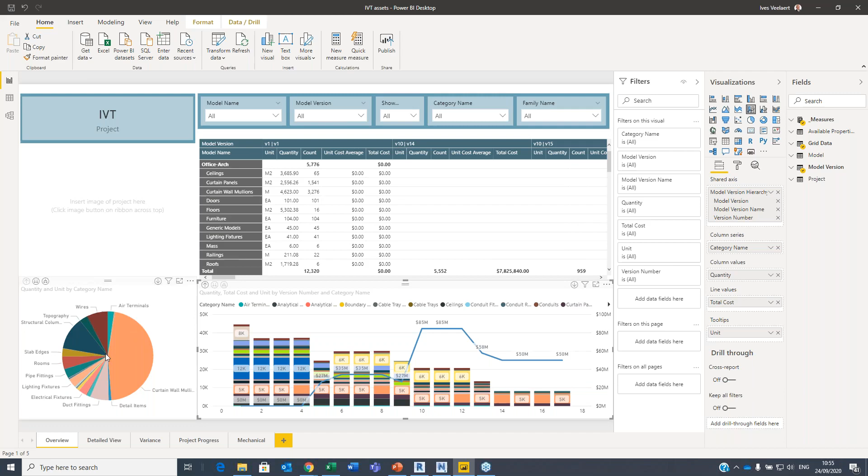See? And we can take it to the next level, and that's the last part of the story here today, which is Power BI. Essentially what you download here from the website is a template file. So what we can do here is have a look at my model. You'll see that we have those very same elements here, and I can look at variance, for instance.

So because we have cost, I can now say I want to have my structural model, my version 17 versus this other one, and it's going to tell me that there is a difference of 3 elements, which is a total cost difference of so much.

So the last thing I want to show here is if I go to my structural model, I can actually show my changes here between version 17 and that very same model that we had in the past.

And it's telling me now that structural foundation, pile cap, and steel pipe is what's added. And those are indeed 3 elements, 1, 2, 3. And that's what's going to give us that result. So it's still showing that. Let me just briefly refresh that again.

17 versus 10, update. Essentially, it's going to point to, because these have been added, so you see the color code, added 3 elements. So between those 2 versions, we will have an extra foundation that's in there. The beauty is, while this is still thinking about it, I can go into my columns, total cost, unit cost, done.

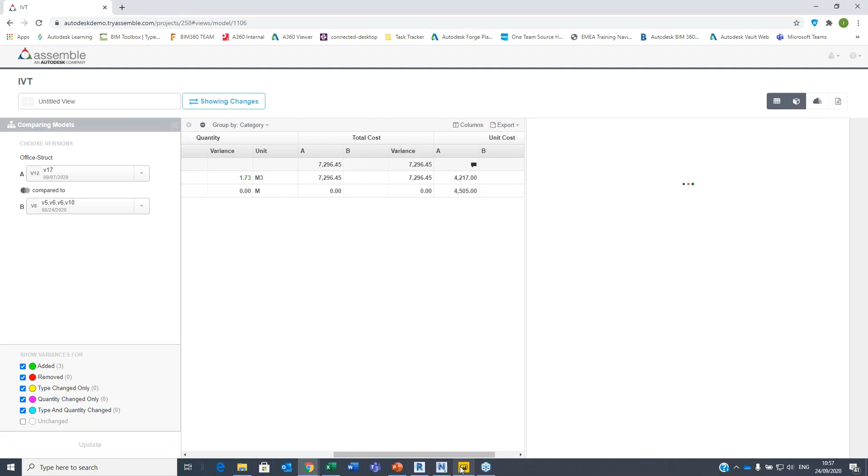And what you'll see is that difference in cost is 7,000, etc., which corresponds to what we have in Power BI. We can then publish this file. This is going to give us a URL, which, guess what, that's full circle now. If I go back in BIM 360, I go into my project home.

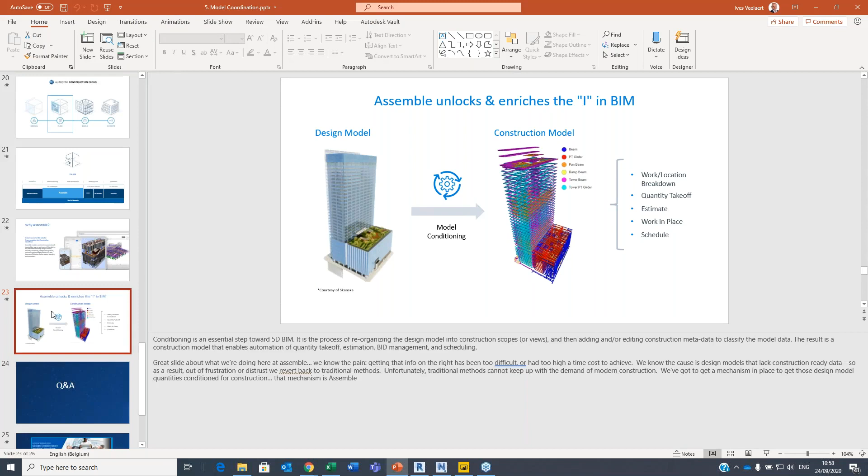I have the very same information here. So that's how this whole thing works before we actually put one brick on the ground, before we actually start building this. So that's what I have for you today, guys. That's all I have. So we have a couple minutes for Q&A.

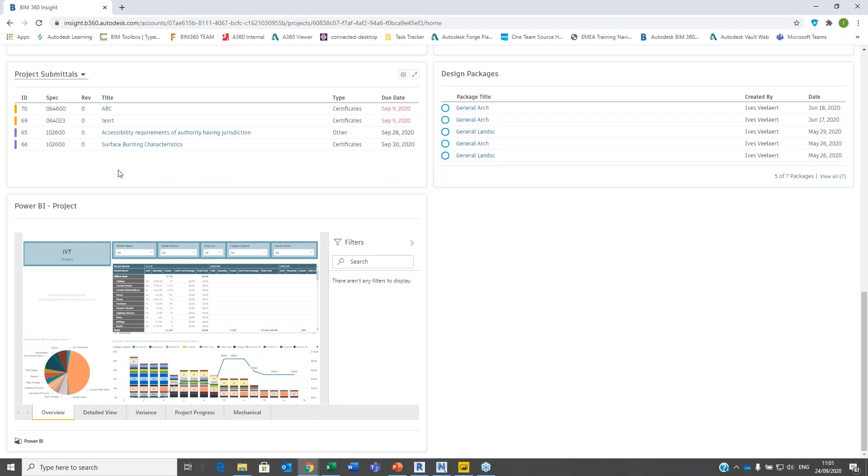Let me just verify that, but that's the wrong one. Let's go in here. So if I go into BIM 360 model coordination and I go onto my clashes, then what you'll see is this one, right? So that's what we have here. So you'd have to take a screenshot of this. That's what we would have.

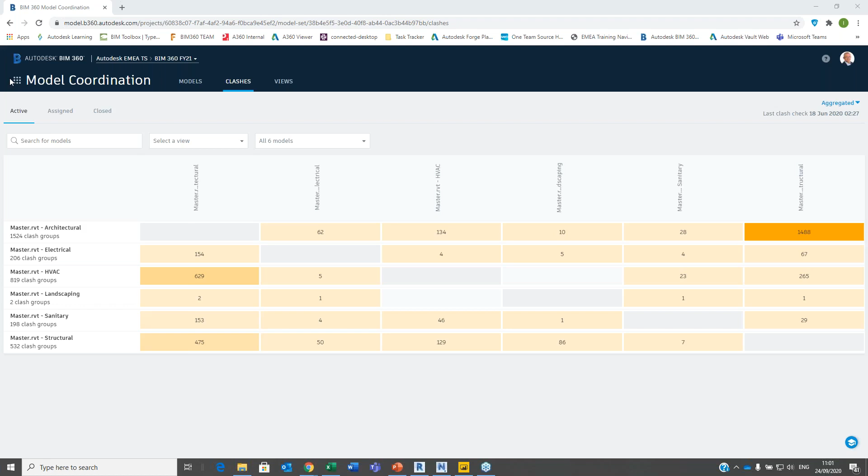But in addition to that, BIM 360 has a lot of good reporting forms, for example, to do issues reporting with, let's say, the specific view of the clashes. Absolutely, that was indeed the next aspect of it. So if we go in here, those issues. So first of all, come on, issues. There we go. So we can first of all filter on different aspects and then just export this as a PDF or whatever. Yeah, absolutely.

Great, and another question is, for example, when you're using a Navisworks dataset in BIM 360, can the Navisworks selection set and viewpoint be accessed and used? Yep, so all the different views that you have in Navisworks, they pop up as views in BIM 360 docs. Yeah, absolutely.